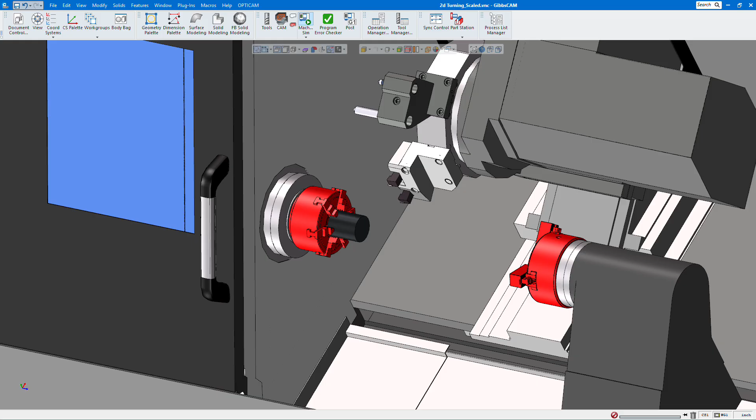In this GibbsCAM Tech Tip, we're going to show you how to set up complex tool holders for turning. In this case, a tool holder with multiple positions. We're going to show you how to set it up. We're going to show you the key features and how to make it work easily. We'll build a couple of tools, generate some tool paths.

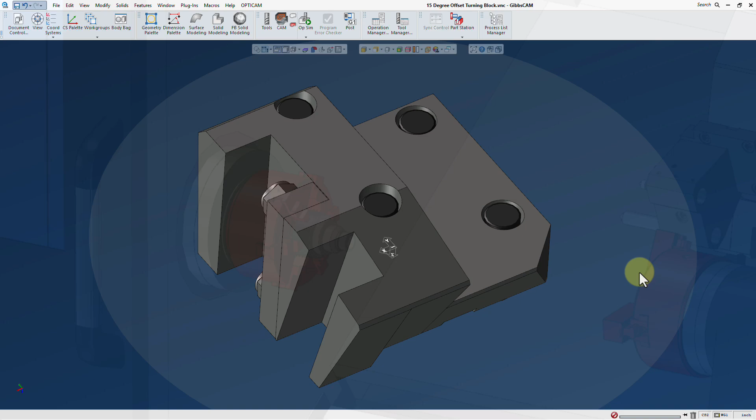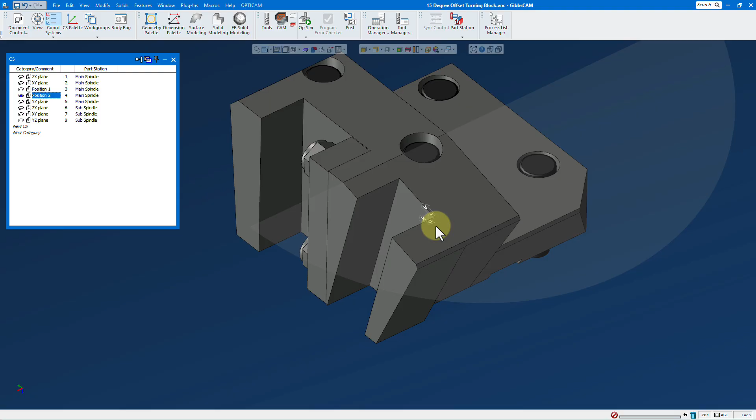Okay, so here's our part. Now what we want to do is check to make sure that it's in the right place, which it is. And we'll need two coordinate systems, which I've already created. So position 1 is for the 0 position, and position 2 is for the 15 degree in this case, clockwise, as it were. Okay? So now what we're going to do is go up here and we're going to open up the tool block library, make sure we're in the right library, and we're going to edit that.

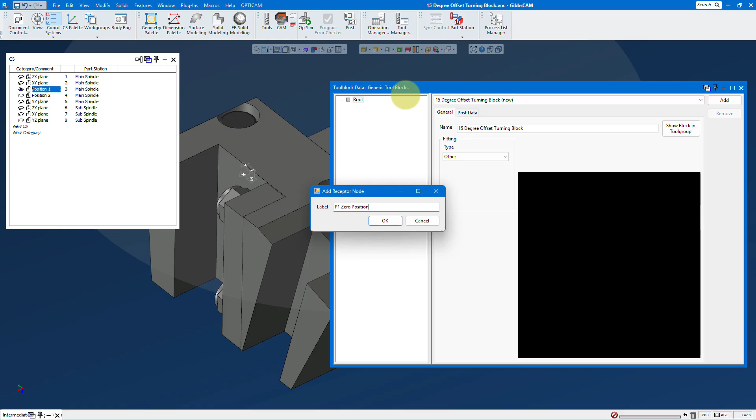Now we need to create a receptor, so we're going to do add receptor, and in this case the label is going to be P1, and we'll just make that 0 position. Okay, and we'll say okay to that, and we're going to use this coordinate system here from the current coordinate system. Automatically fills in the values. It's really perfect. We'll switch coordinate systems, and now we need to build another receptor.

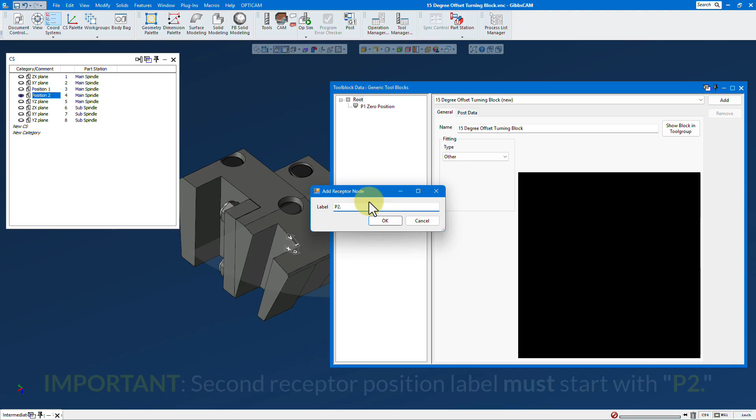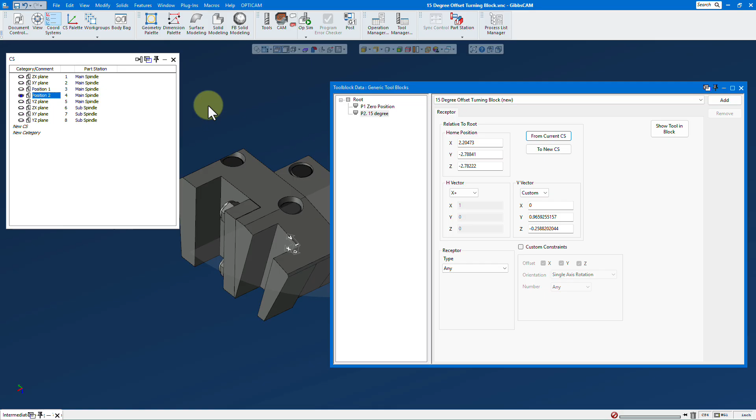In this case, P2, period. And that's what's important here, the period. So P2 period, that's what tells the software that there's a second position on this tool block. Okay? So here we'll just put in 15 degree. The P2 period, I can't stress enough, is critical. Okay? And we'll just say okay to that. Now what we want to do is use from current coordinate system, fills in all the values. You don't have to calculate anything. It's all done. Perfect.

Next, we're going to add the bodies. So we'll go to root, add child, simulation body. Again, add the child, simulation body. These are the bolts, and then the spacer. Add simulation body. Pretty easy.

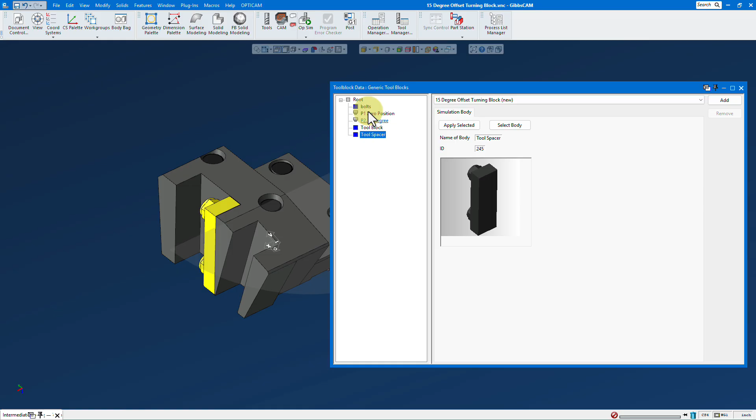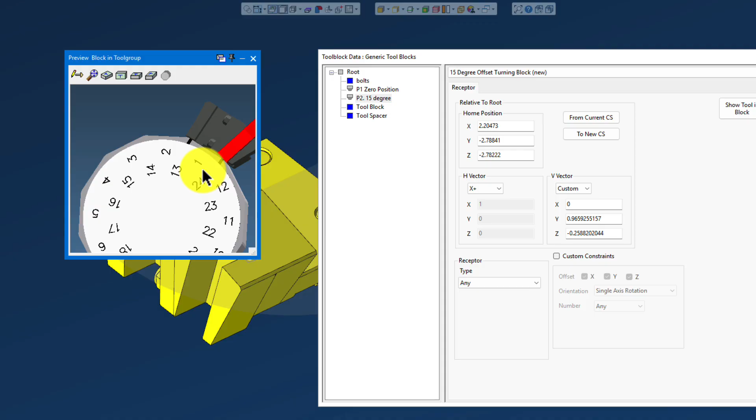Okay. So now we're going to go up here and we're going to open up a tool. And what we can do is if we show the tool in the tool group, you can see there, that's position 1. You can see the tool in position 1. If we click here, we can see the tool in position 2. So very nice, very easy, very fast, easy to set up.

Okay. And then we'll just add this to our library, and Gibbs is going to go off and do what it does and put it in the library for us. And there you go. So now you have a new tool block in the library. Okay? Easy.

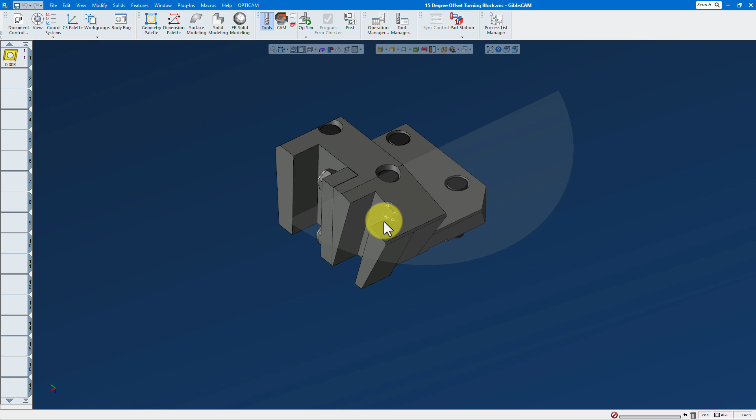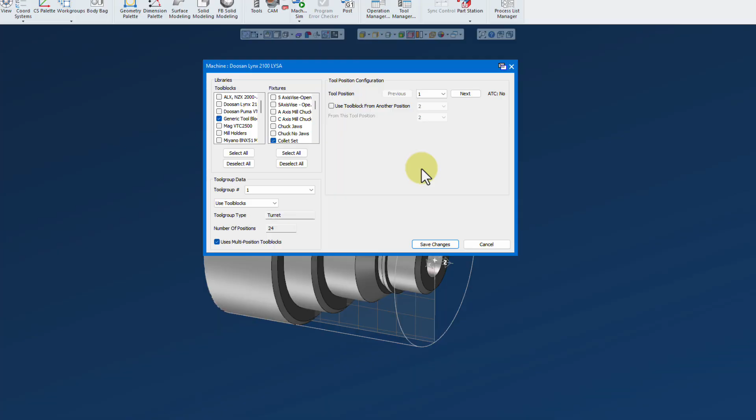Okay, so here's our part. And there's something else we need to set up. So we're going to go up here and we're going to set up the machine data. Make sure you're in the right machine because it is machine specific. And here we're going to set up the tool position configuration. Now, what does that mean? Well, the tool block is going to be on position 1 on the turret, and it's going to share position 24 in a clockwise manner. Okay? So that's how it works. So 1 and 24 going clockwise.

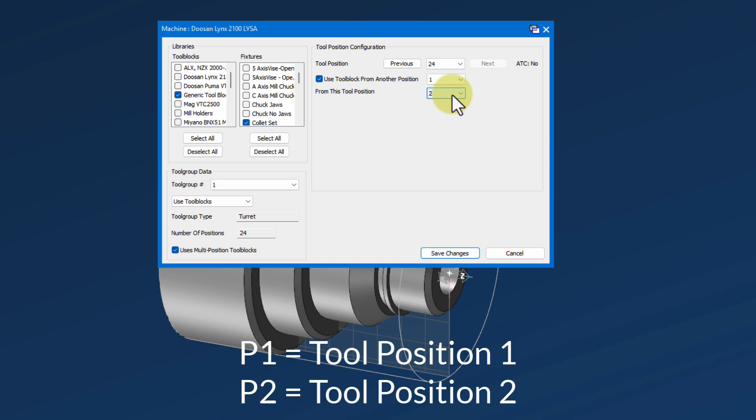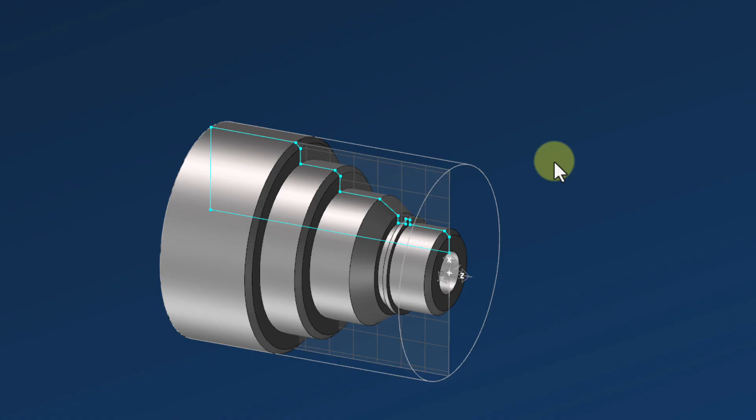So what we want to do is go down here to 24. So 24 is the angle position. The block is in position on the turret 1, and we're going to use the second location. So we'd set up P1, P2. So P2 is the second location. And that's how it works. Okay. So based on your turret configuration, it could be clockwise or counterclockwise. So then we just go through and we set all of the ones that we need, and that's it. Okay. So we save the changes, and now we're ready to create some tools and put a couple of processes on it.

So we'll open up our tools, and we'll set this to position 1. And this is the way I would do it. Pick the block. There's the block we created. And we can look and we can see that the tool is in the block in position 1.

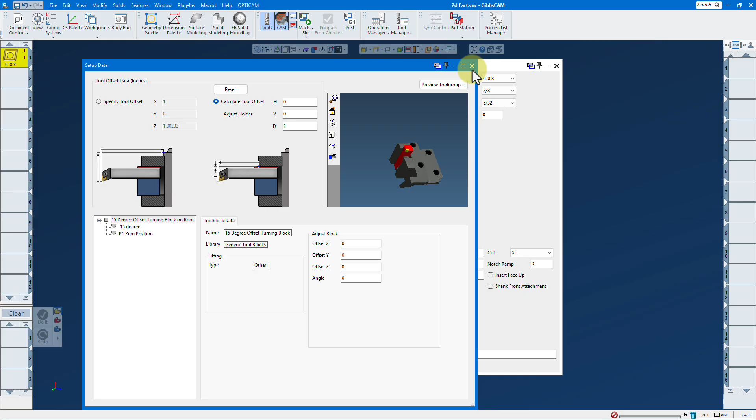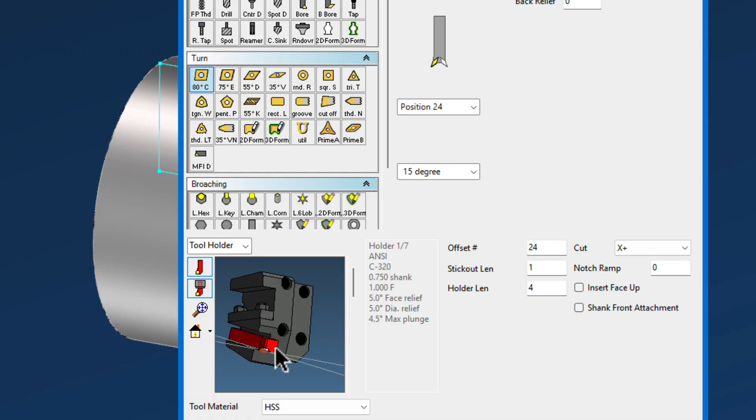Then I would close this and create tool 24. Now, just make sure it goes the right way. But you'll notice that it shares the same block in position 1, and you see that the tool is in the correct orientation. You don't have to do anything. You don't have to change any numbers. You don't have to make any calculations. It automatically goes in the right position. Okay.

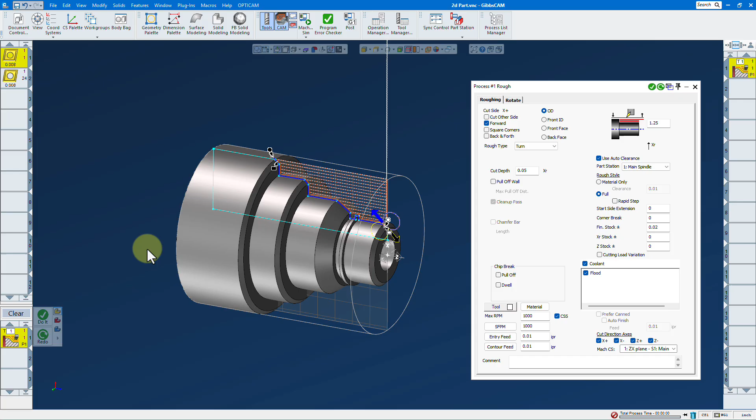So now we would just generate a couple of tool paths as if we would normally create some tool paths, just to show you. And we'll drag that up there and we'll do that. And then we'll just bring down the 15-degree tool so we have a rough and finish, for example. All right. Let's look at that in a rendering.